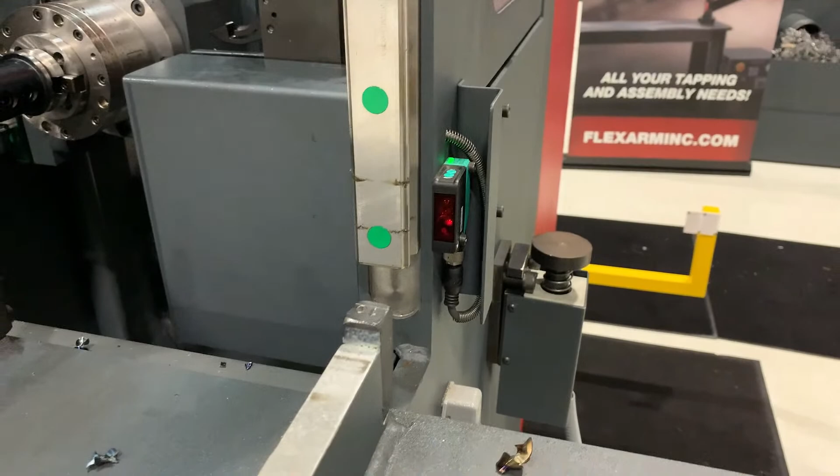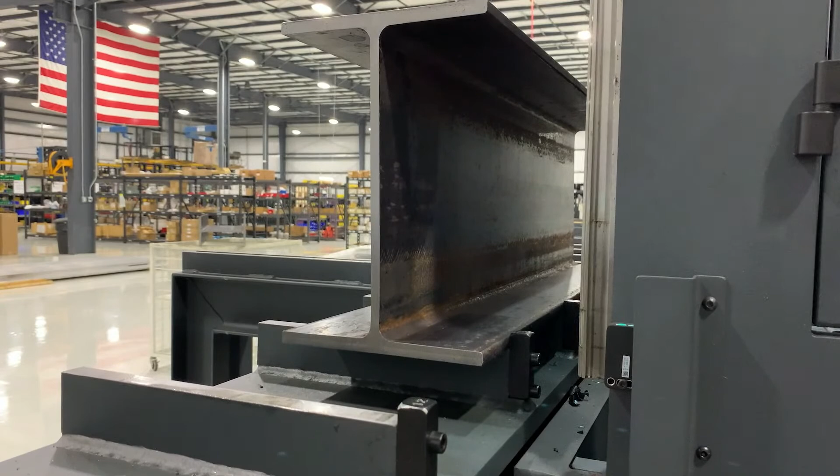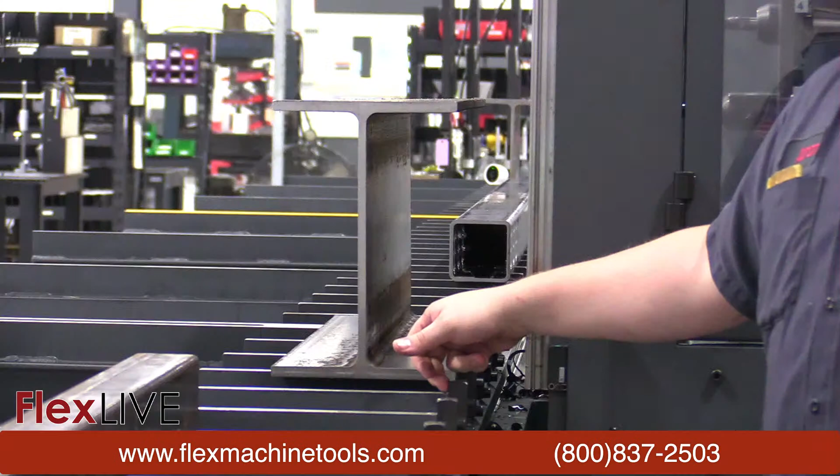So as far as getting your parts set up, the machine itself is going to find the edge of your part. So there is no probing or using an edge finder. The top of the machine bed that the part is sitting on is going to be your Y0. So your laser is going to find your X0, the top of the machine bed is your Y0, and you can see the little black stops that you're pushing the part up against. The front face of that stop is going to be your Z0. So setting the part up itself is super easy. And I'm going to go right into drilling the first set of holes here, and we'll get this demo rolling.

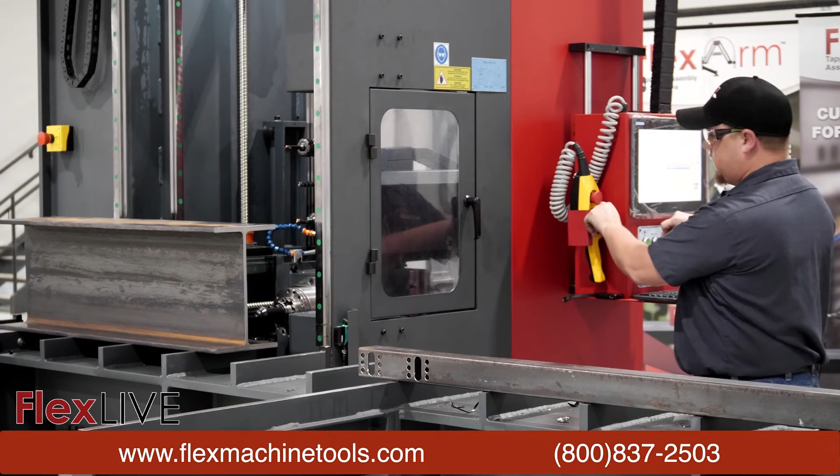So here we have the machine finding that X-axis with the laser. And here I've got a structural drill from Allied. Here we have the hydraulic foot coming down. This is going to act as our clamp to hold the part in place as we drill our holes.

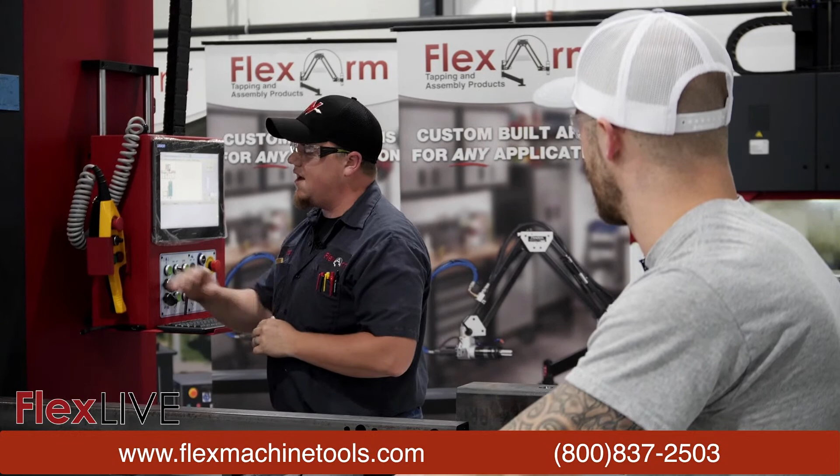Very, very nice. So Aaron, on that cycle time of those 4 holes, what were we looking at timing-wise? So we're only looking at a couple minutes here, and you know, I had to start with the first tool that you're going to use in a program. Stays in the spindle. So with that just being a one tool program right there, you're looking at just about a minute to drill those 4 holes.

The Allied drills are really special when it comes to cycle times. We got the Gen 3 structural style drill, which really kind of gives us the best feed rate, which gives us the best cycle time. So yeah, it was a pretty quick cycle there.

Yeah, there we go. It looked like it was relatively quick, and for those of you joining in, I'm sure the machinists out there, it's definitely got that good machining smell, the one we all love. So, which is great.

And another thing to note, even though we're utilizing one tool, we can hold up to 6 different tools on this machine alone, given its wide variety of capabilities. So, anything else we need to know either about the drill or just the general operation, Aaron? No, I mean, what you saw there was a pretty easy example of how this machine's going to run, whether you're milling slots or drilling holes. The machine itself is built for simplicity.

We do have the through spindle lubrication. We do have exterior and interior. We don't use a flood coolant type of application. So we have a lubrication container reservoir in the back of the machine here that runs the fluid through the tool or externally on the hose to get that lubrication to the tool.

And you saw the hydraulic foot. As far as clamping goes, if you're just drilling some simple holes or even milling slots, that hydraulic foot is what holds your part in place. So any type of H-beam, I-beam, tube, channel, anything like that, your hydraulic foot is going to be the application that holds your part in place. You can put like an angle plate on here, bolt some vices to it if you want to machine some flat bar, but that hydraulic foot is what does all of the work holding.

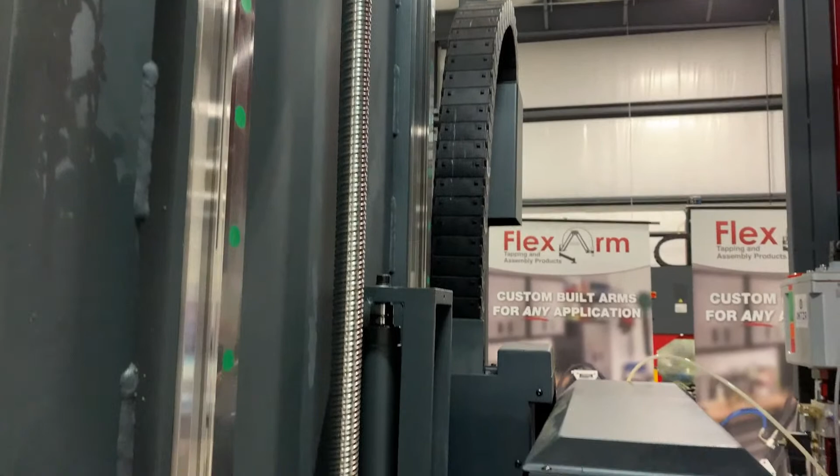Sure. Isaac, if you can actually roll into the TeamViewer view of the control here. So what you're looking at, you see these different tabs up here at the top. This is the general software of the machine itself, NJ Wind. So we have these different tabs up here, the alarms tab, which shows you any issue that you have with the machine. You'll get a red X up in the top right hand corner, and it'll explain to you what that alarm is and where on the machine you can find that issue.

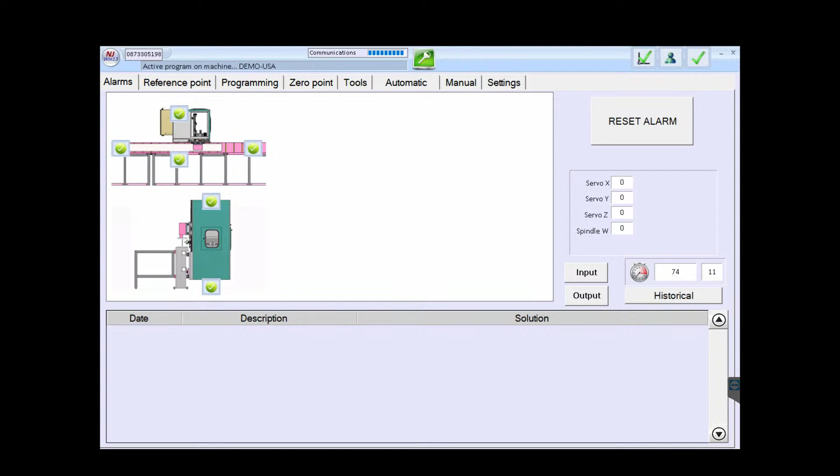The next tab that you're looking at, the reference point, this is how you zero out your machine, which is pretty standard across most machines out there in the industry. The machine has to find that original 0 point. The next tab is the programming tab. This tab here is where you will load and save all of your G-code ISO programs, and I will touch base on this a little bit more with the software that is built into NJ Wind Drill Cam. That's the software that we use to program the parts.

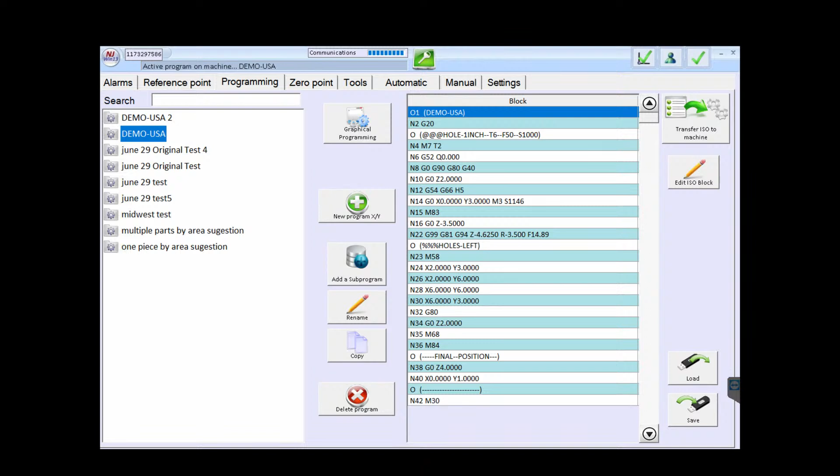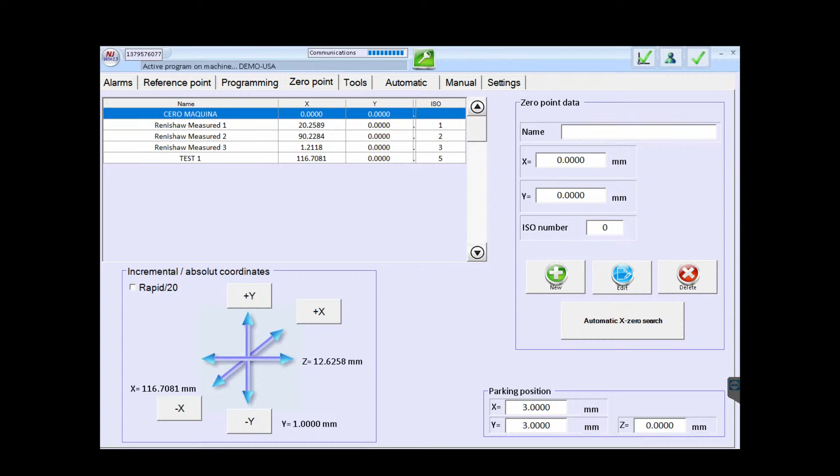But here, the next point, the 0 point tab, this is where you can set all your different work zones. You saw the 40-foot bed, and you can put all kinds of different materials, or if you're working with a 40-foot piece, you can put the whole piece up here. But this gives you different work zones, areas along the machining bed where you can set your work offsets. Next is the tool tab. Here you're looking at our tool library. As you're doing different parts, different materials, you're using different tools, right?

So you've got to create your tool based off of what material you're running and apply the feeds and speeds that work well with that material. And as you go about programming, all the feeds and speeds and everything that you have entered in with that

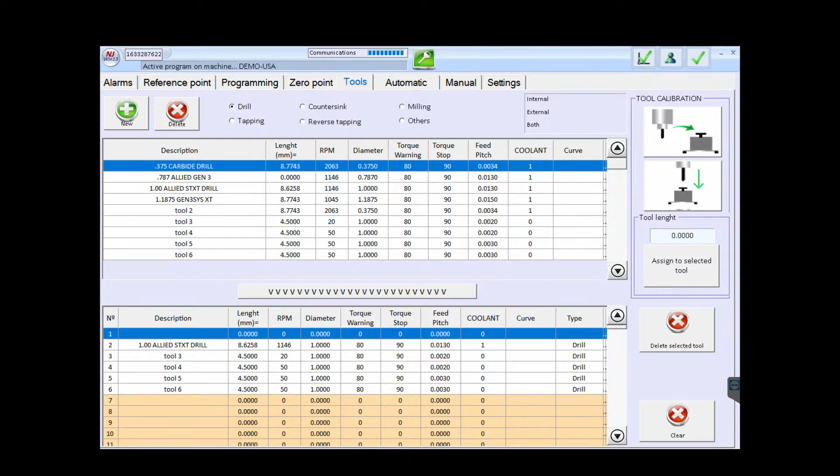tool stays with it. Here in the manual tab is where you do all the manual movements of the machine, moving your X, Y, Z axis. You can move that hydraulic foot up and down, do any manual tool changes here. But next, Isaac, if you want to go ahead and roll that video, I'll kind of go across the DrillCAM, which is the programming aspect of this software.

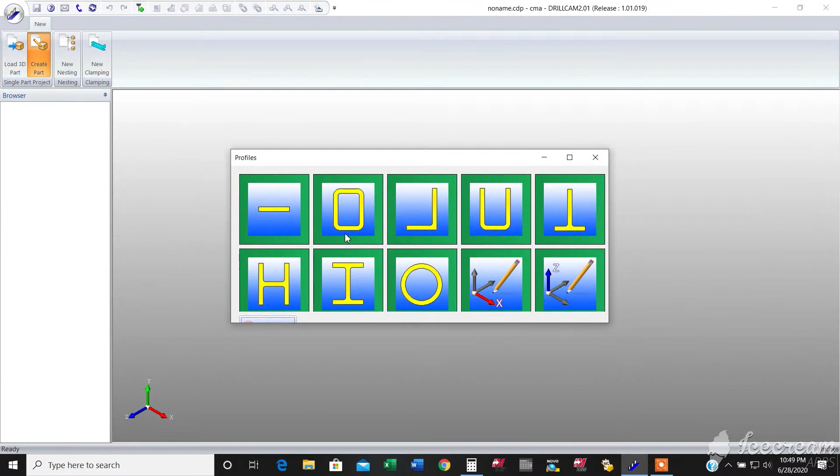So what you're looking at here, we're going to start loading a new part, and really we're going to draw our own part. So here you've got the different profiles of material, and once we select a material, it's just putting in what sizes of the part that you're using into the software. You can create your own types of materials. This is that drop down box that you're looking at there. So there you can see the part. We have a 4x4 tube with a 1/4 inch wall.

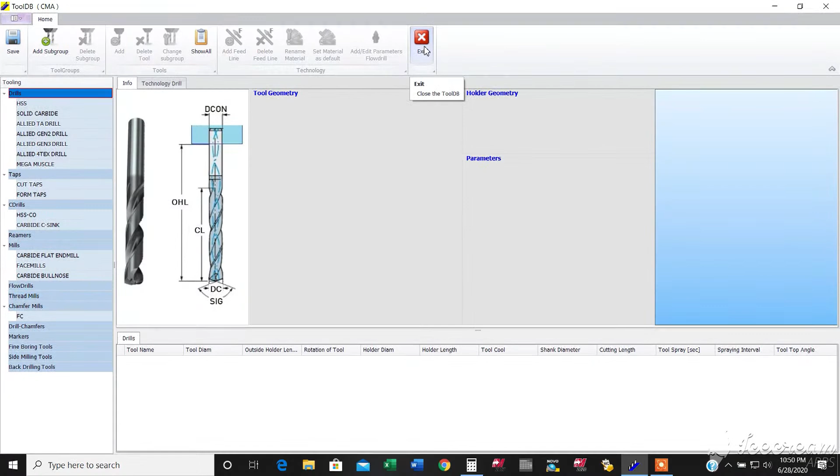The next thing that I'm going to show you is the tool library. Here you've got main groups. You've got drilling, tapping, milling, counterbores, taps, and then you can create subgroups in each category. But this is where you would create all of your tools to use within your software. So first we're going to do some easy stuff. We're going to drill some holes first.

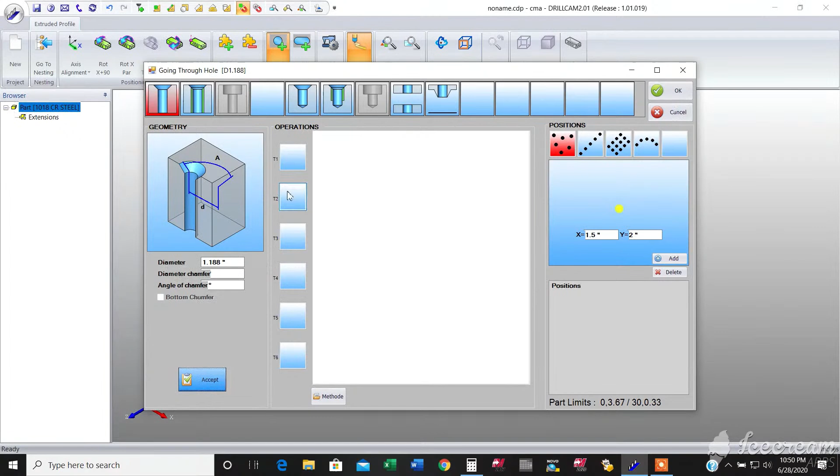So here I just have to select which face of the part I'm going to drill those holes on. So I'm going to select that face right there, and we've got the diameter of the hole that we're drilling. If we want to add a chamfer to it, we can. Here we're just going to drill a hole. So the next section is what tool are we going to use. So here's the subgroups I mentioned earlier that I had previously created, and this is the Allied drill that I'm going to use to do this.

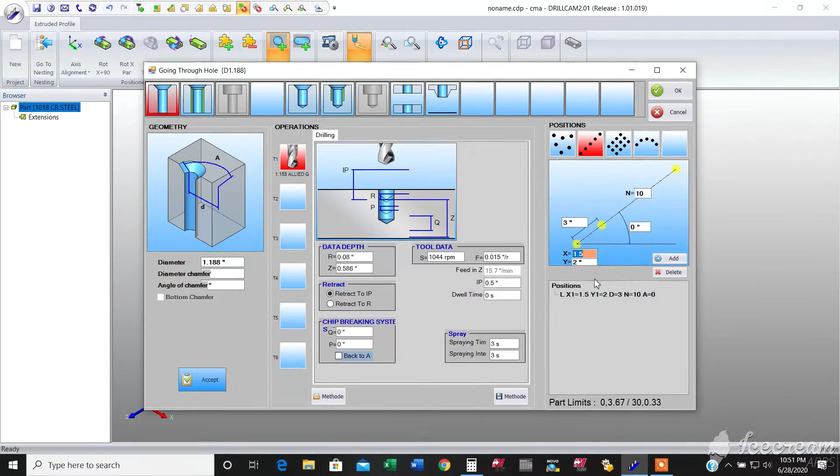Now when I talked about creating a tool and importing all of that feeds and speeds information, anytime you use that tool, that information always follows it. So now, basically we told it what we're gonna do, what tool we're gonna use, now we're telling it where we're gonna do it. So this is just me putting in all the information of where those holes are gonna be located, and you can see there the line at the bottom that tells me where those holes are gonna be. And okay, and here are our holes.

So the next thing that we're gonna do is I'm gonna take these first two holes and we're gonna turn that into a slot. So it's just as easy as selecting a profile. Same thing as the drilling, selecting what face I'm gonna machine on the part. And the checkbox that you're seeing right there is how deep do I wanna go? It knows it has a 1/4 inch wall. So when I check that go through box, it knows to make sure I go all the way through that wall.

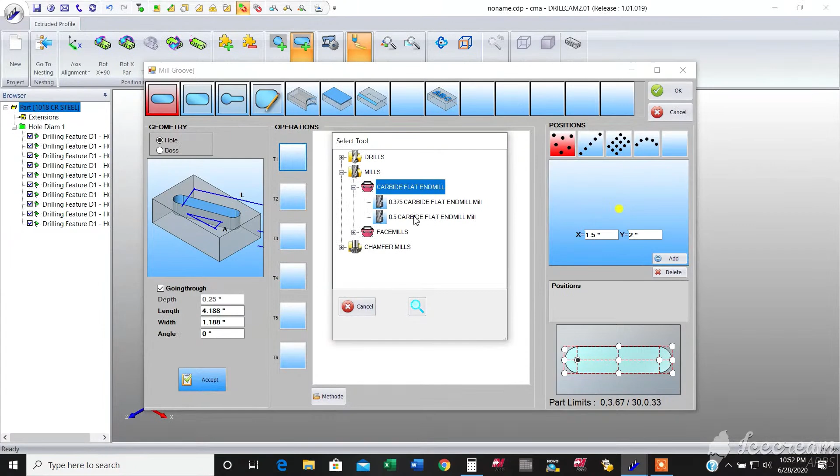Here we're just setting up the different dimensions of that slot. And it's going to be the same process. Once I tell it what I'm going to do, what tool am I going to use? So here again are the subgroups of the tooling, and I've already created my end mills that I want it to use to machine that. Now how I said earlier that tooling information follows that tool every time you use it, you can change it. So here I did not input a feed for this tool when I created it, because I can change it depending on the different types of material.

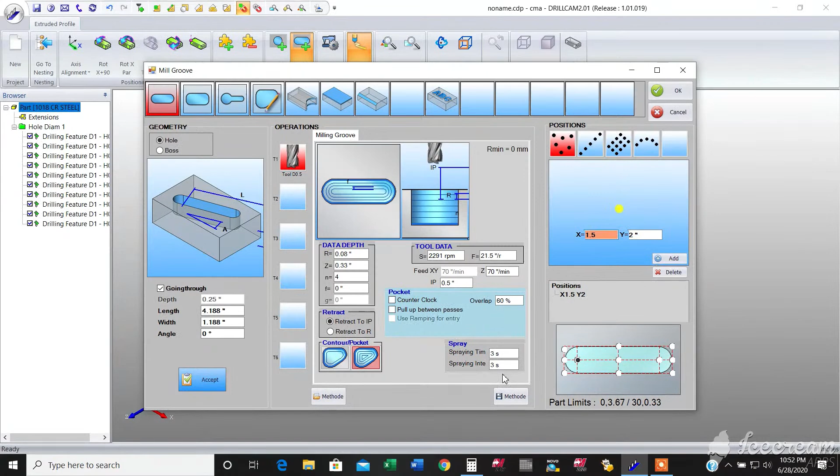So what we're doing next is basically telling the machine where on that part I want to make that slot. Same thing, giving it that hole location of where to start, and the length and width of the slot. And as soon as I hit OK here, you will see the slot. There you see the tool path on the part. So now we have the part programmed. Now we need to put it on the machine and tell the machine where this part is going to be sitting.

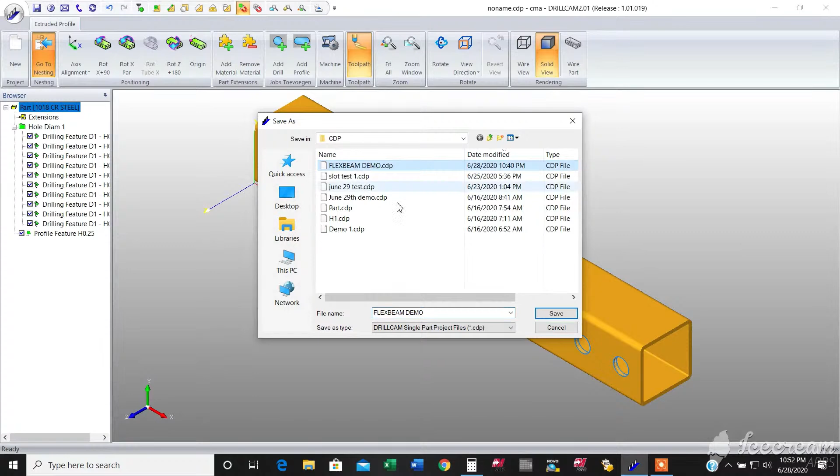First thing we've got to do is obviously save the file so we don't lose any of this information. And then when we go into our nesting, you will see the entire machine bed here. You can see the part is attached to my cursor, so when I zoom in, the stops that I was talking about earlier, I can place that part directly along one of those stops that are on here on the machine bed. So once I put my part on the table, I'm going to build my program.

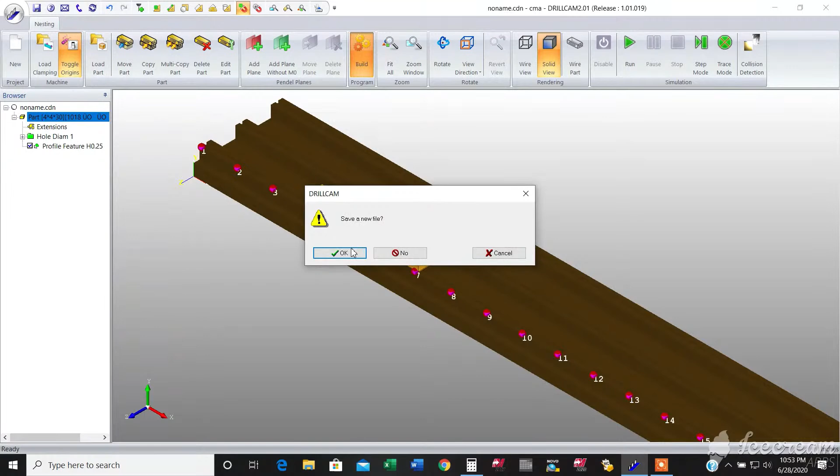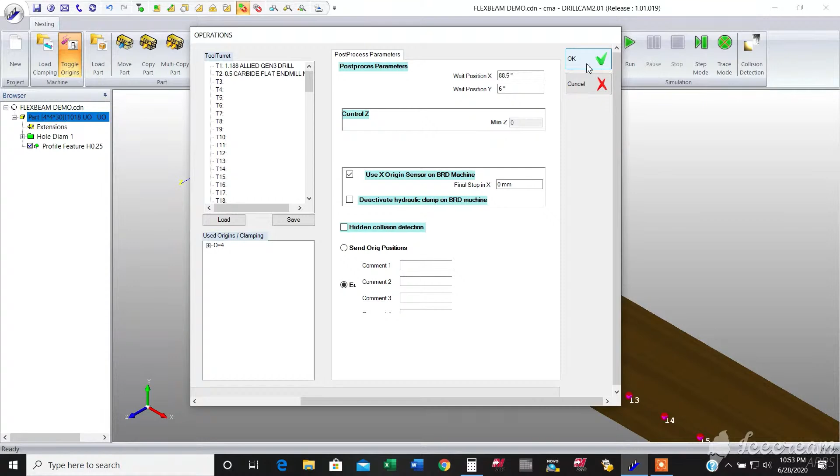So in the build tab, this is where I can tell it if I want to use the hydraulic foot. Do I want to use the X-axis laser to find my part? It gives me my tool list that I have put together for this program. And as soon as I hit OK here, it's going to provide me with my G-code ISO program, and all I need to do at this point is save that onto my USB so I can load it onto my machine. Here's that ISO program that I was talking about. You see the tool change to the end mill.

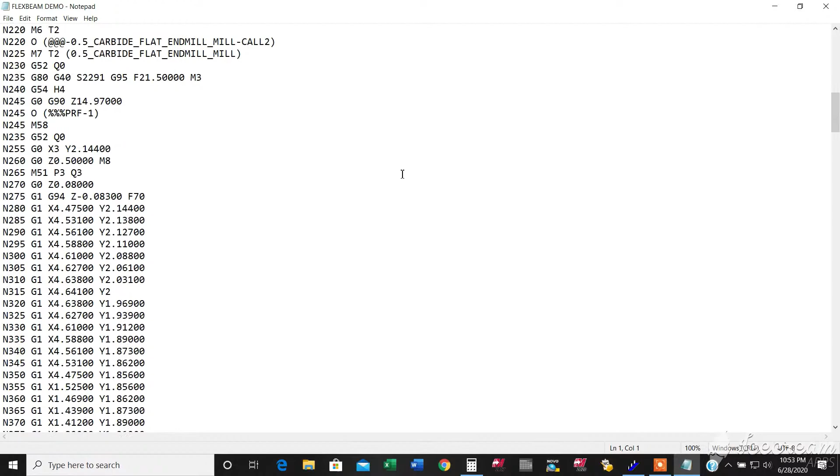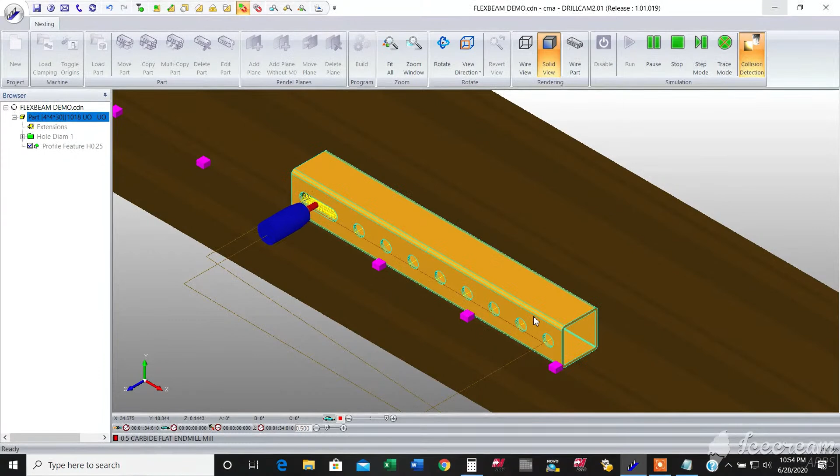Now the nice thing about this software also is after I get my G-code program, I can also simulate my program. So I know if I'm going to have any machine crashes, if I'm using the right tools, that sort of thing. It's a very handy application to have within the software itself. So here you can see the mill machining out that slot that we made. And like I said, this is just a simple visual for those customers out there that don't have the experience with a G-code program, any programming. It's very simple, very easy to use. And yeah, that's pretty much the gist of the programming there.

There you go, man. Spoken like a true expert.

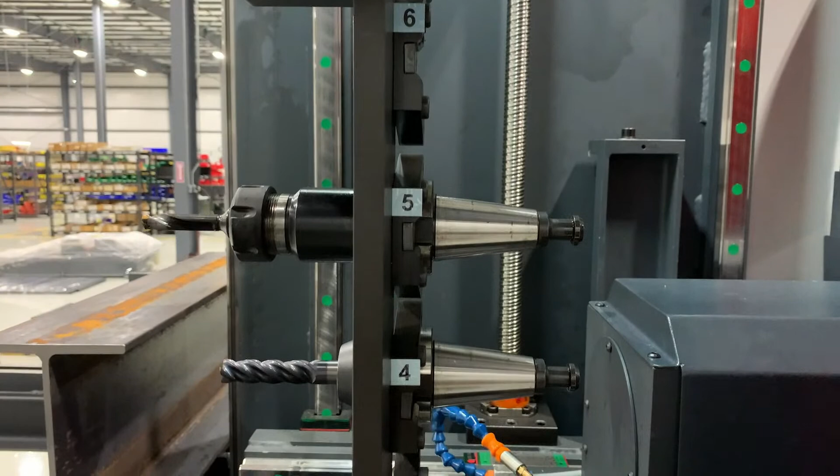And so Isaac, we talked a little bit about the movement. So if you could pull up a little bit of that B-roll, because what we're looking at here with this specific machine when it comes to the movement is on that X-axis, you're going to be moving via a linear rack and pinion. Now, when we move it over to the Y, that movement is actually controlled by a precision ball screw. So we're seeing here a general close-up of the inside of the machine, so you can look more at those movement components in tandem with the multiple tool changers that we have available inside the machine.

And you're seeing here, this is actually going to be our light curtain that lives along that X-axis. Aaron, can you tell us anything about this light curtain in general? Yeah, so anytime that this machine is in automatic mode, when I ran that program before, I have a little switch right here that I can flip from auto to manual. Anytime you're in that automatic mode, that light curtain is active. So as that machine travels, anytime your operator gets within that light curtain, the machine will alarm out and will stop and keep your operator safe. Very good. A solid demonstration of just general features.

So, Aaron, I think we've got one more op that we're going to be able to do today, or what are we looking at? We're going to move on, actually. So what we're going to do next is, I think I'm done with the machining aspect of it. Okay, so yeah, just go ahead and take it away. Good deal. Well, then what we'll at least do is, if you don't mind, let's show a little bit of the travel along that X.

Yeah, and something I don't know if we mentioned before was the pendant here. The pendant helps me as the operator. It has a feed rate override toggle on here that I can control the speed of the machine itself. And this is anytime you're doing any manual traveling, and also when you're running your program. So I've got it sped up here, and then I can slow it down and can really control how fast that machine is moving.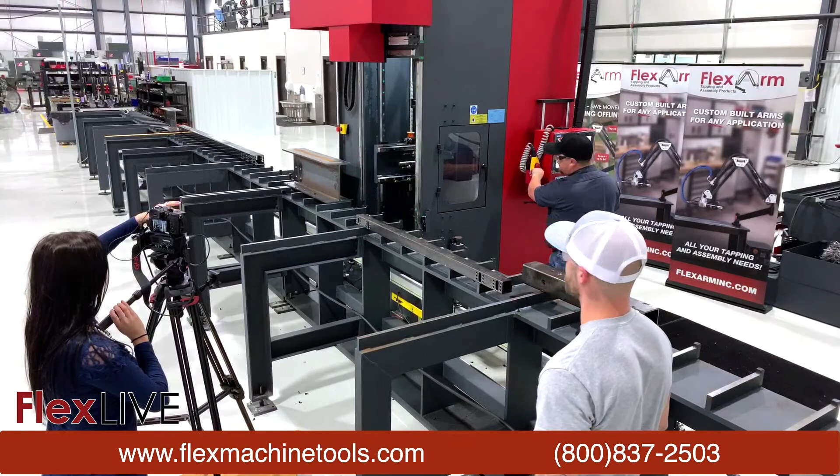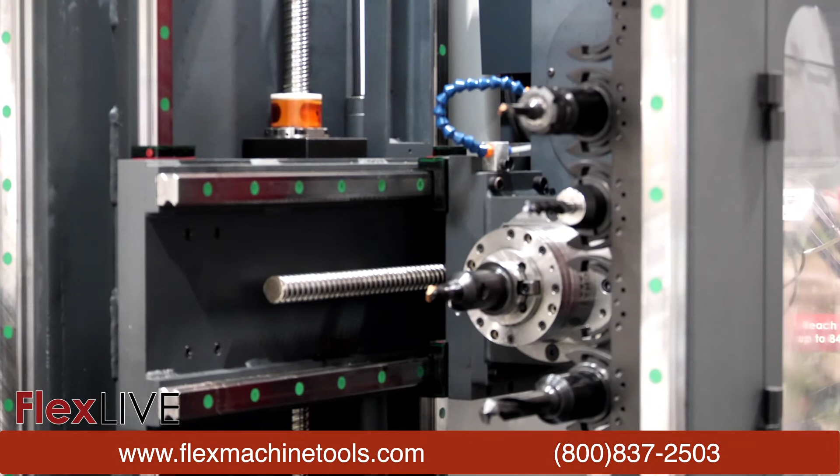So here, this is something that I'm going to do again in the manual tab, because I'm manually changing these tools. So here we're going to put this tool away, and we will grab the next tool. Now every time that you are using a different tool, when you run a program, you need to tell the machine how long the tool is, right? So we're going to do another tool change here. We go orient the spindle.

Now what we have here on the side of the machine here, if we can get this into a camera view here. So this is something else that's pretty nice about this machine. This is our tool touch off.

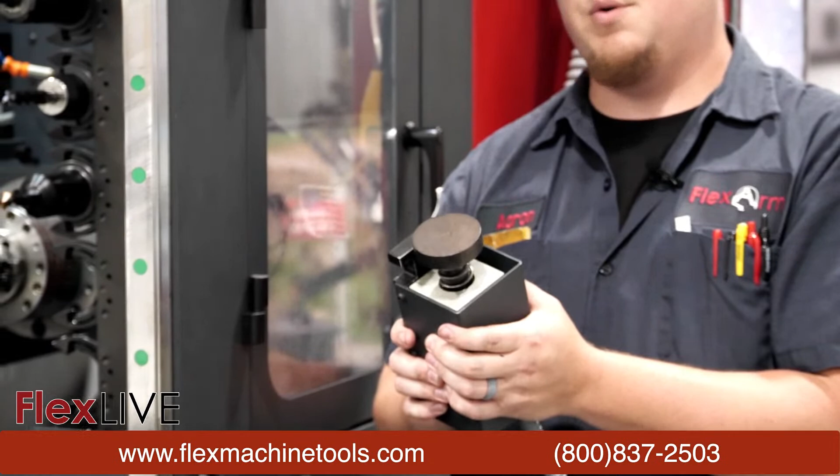And how it works is once you load all these tools into the machine, the pad latches onto the side of the machine bed, and you're going to touch your tools off here, which will tell the machine exactly how long that tool is. So when you run your program, it knows how deep you got to go and whatnot. But it stays right here on the machine, travels with it, and you can essentially touch your tools off at any place that you need to.

There we go. Very good, very good. Well, is there any other items that we should be looking over today, Aaron? I know we've covered a decent amount, man. No, I mean, I think this was a pretty good showing for the first time, the launch of this machine. We will definitely have more videos to come showcasing more features. Oh yeah, absolutely. A little bird told me that we might be doing a little bit of milling here soon, so we'll definitely have to see.